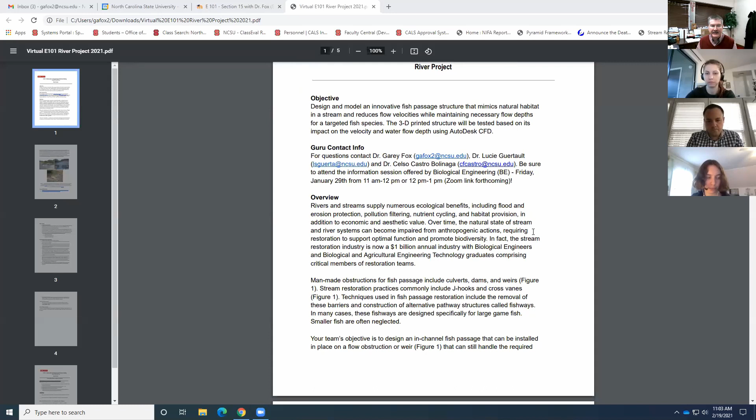What I thought I would do first is just go over some basic concepts, primarily from the river engineering project. Hopefully you can see my screen now. I just shared the project description. Really what we're aiming at is the fact that we want you to come up with a design that's going to replace some of the common structures we use in river restoration and stream restoration practices.

River restoration and stream restoration is now basically a $1 billion industry in the United States. Our department has a lot of alumni that work in this area. In fact, the project you're working on this year was originally proposed by one of our alumni, Chris Bass, who owns Chris Bass Engineering.

Appropriate to his name, with a bass, we're doing a fish passage study. The pictures you see in the project description are the typical types of structures put into streams and rivers. They can be made of rocks, or a lot of times logs, really hard structures. Many of these are referred to as a J-hook or a cross vane. In many cases, these structures can actually create a situation that prevents the migration of fish species up or downstream of that structure.

These structures are very good in terms of helping us control the flow and the sediment transport. A lot of times in stream systems, we like to refer to rivers and streams as living systems, and as they evolve over time, if we have an urban area upslope getting a lot of rainfall, but we've made those surfaces impervious and you're getting runoff into those streams, it can start to erode that stream bed, and that bed will start to drop down and make the banks get steeper, and then the banks will collapse in.

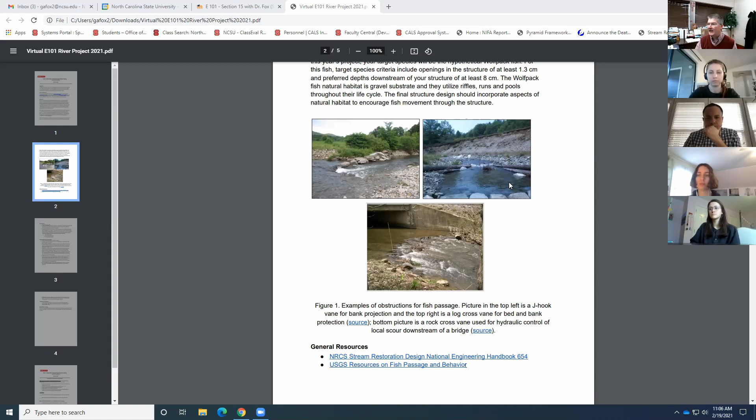A lot of times these structures are designed based on just hydrology and sediment transport, but in particular, we want to also consider the ecological impacts of the design as part of the river project.

There are a few different things that are going to be part of the requirements for the project. They're listed there under deliverables, and then also requirements and constraints.

You are going to design the structure to fit into our existing flume. We have two flumes in the department, and hopefully our second flume will be constructed here very soon. We have a smaller size flume, and Dr. Guertault is going to show you that in just a minute, but we have certain dimensions associated with that flume: 9 centimeters high, 20 centimeters long, and 7.6 centimeters wide is the dimensions of your structure.

You also need to have at least one contiguous opening of at least 1.3 centimeters. That could be a 1.3 centimeter diameter hole, or it could be a rectangle, something like that, but it needs to be open through your entire structure.

Unfortunately, this year, because of COVID-19, we are not going to have you 3D print these structures like we did in the previous year. Instead, we're going to have you just send us your 3D models, and then we will use those within a simulation package within Fusion 360, called CFD, or Computational Fluid Dynamics, and test your design that way. We'll talk about that more in just a minute.

There are several resources available for you to use. There's an NRCS Stream Restoration Design Engineering Handbook, which can be a very good resource, and also a USGS resource on fish passage and behavior. That can be a very good resource for the project.

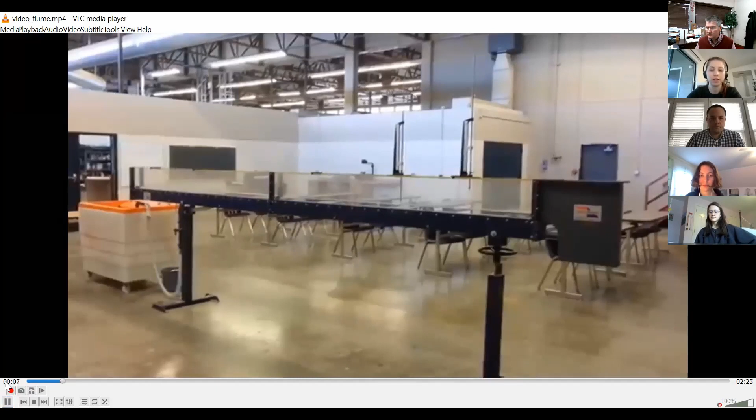So what you see here is the same flume as we have in Weaver Labs. If we get closer, you can see what happens if we have just a flow that is not disturbed by any type of structure. Then you will see what happens when we place actually a structure in the stream.

So this is called a broad crested weir, and that can represent the type of structures we put in the stream, such as the J-hook. Basically what it does is it creates an obstruction in the stream.

The water here is flowing from the right to the left, so the water level on the right will increase, and on the left you will see that the water level will be less higher, and the velocity or speed of the water will also be higher. Basically it changes how the volume of water is distributed upstream on the right and downstream on the left of the structure, and that also causes an obstruction for the fish.

So it's a solid obstacle, so the fish is not able to pass through that. And on top of that, the conditions on the left are not really suitable for the fish because the water levels are too low and the velocity of the water is too high. So it's not a good condition for the fish to swim there. Think of it as the worst case scenario that a structure can do in the stream.

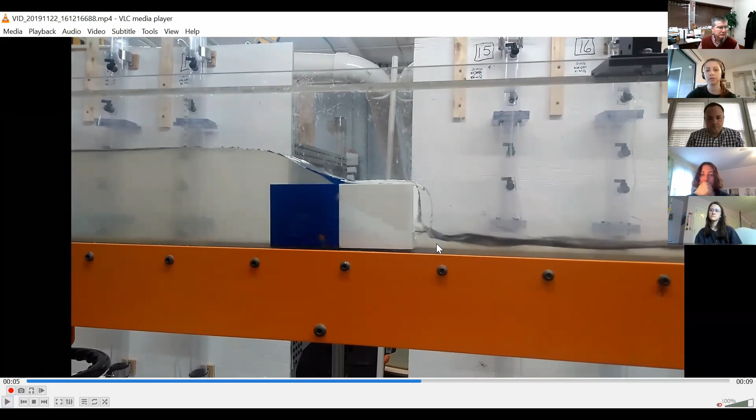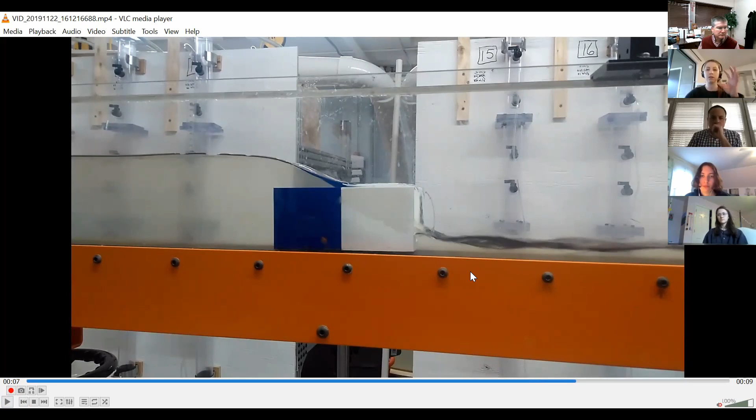So you can see here the water level upstream on the left is quite high, and downstream on the right, it's quite low and very fast. So overall, this was not a very good solution. It did not provide adequate conditions for the fish to pass through. Of course, it's open, so they could pass through, but in terms of water depths and speed, it's probably not very suitable for the fish.

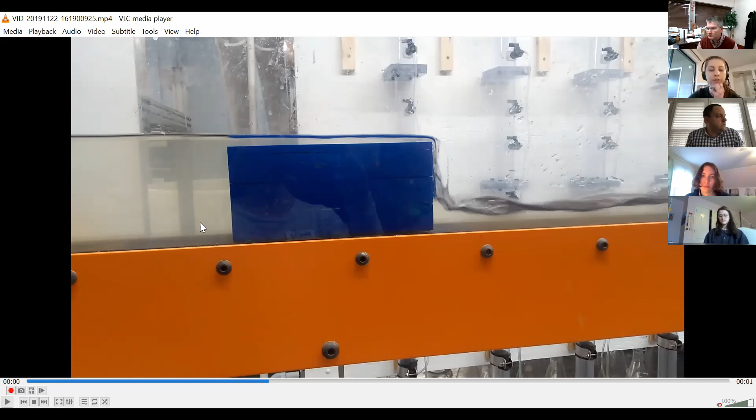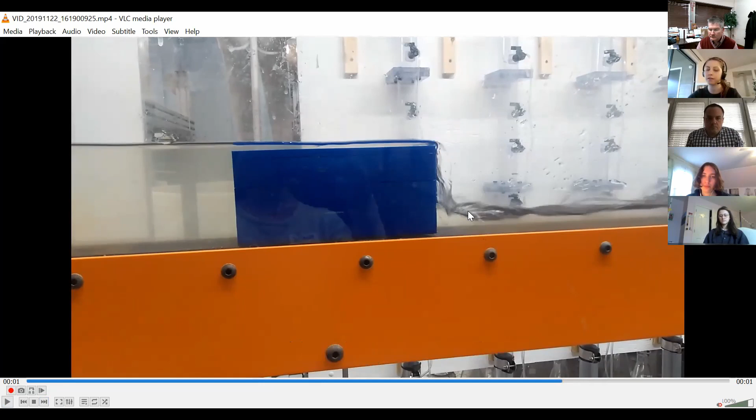So I can show you other examples. This one as well, I think, was a solid weir with holes in it, openings at different levels. And similarly, it does not really improve the conditions compared to the huge wooden block that we saw, the broad-crested weir from the previous video. The water level is still really high here and quite low, and the flow is fast on the right as well. Let me see if I can show you one more.

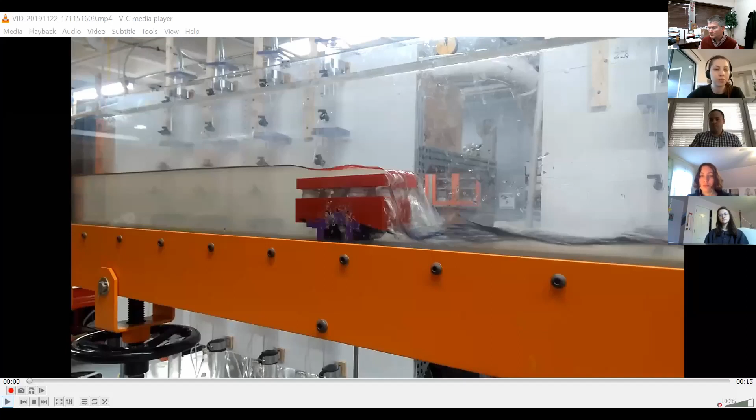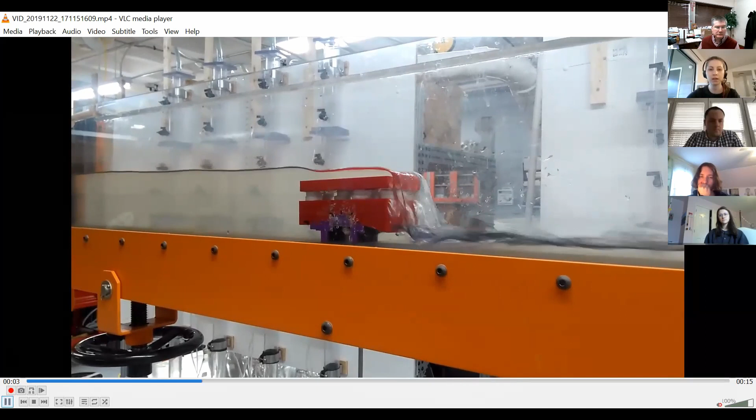So here you see an example of another structure which was a bit more innovative, with different types of holes. You can see that it provides more room for the fish to pass through, but it's still not ideal because the flow here is still very fast. So our goal is really to increase the water depth, the amount of water able to pass through the structure, to make sure that we even out the volume of water on the left and on the right of the structure.

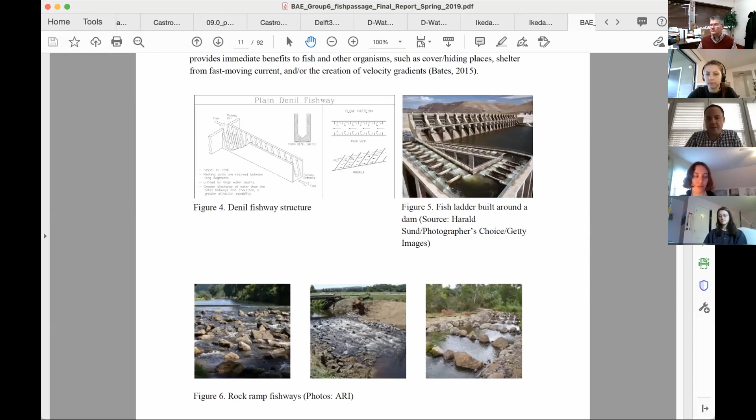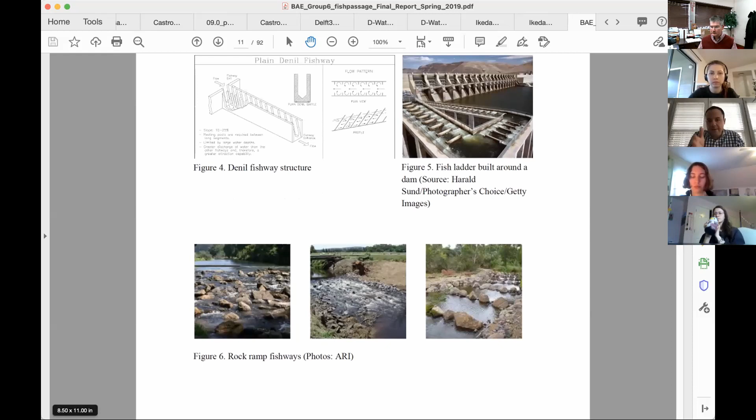And you see the obstructions around the ladder. The idea is that you create fast moving areas of water and slow moving areas of water so that fish can actually go through upstream. And here on the bottom, you see some fish pass structures as well, but these are more intended to mimic the natural environment, so you see a lot of rocks. The idea is the same: rather than having these steps in the dam, you have rocks that create areas of high speed and then areas of slow speed so the fish can rest as it moves upstream.

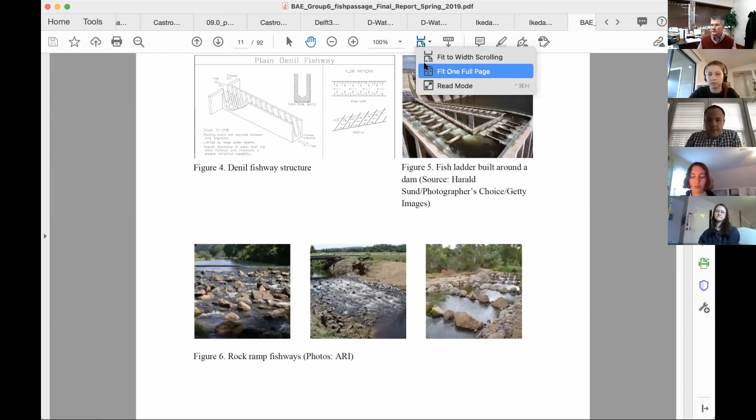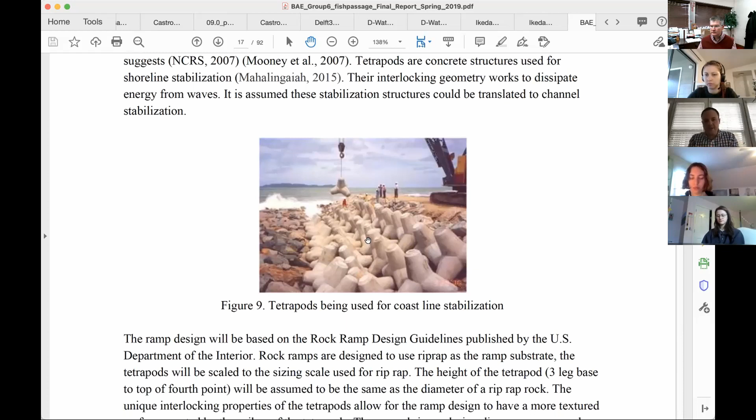And then the project that they actually did was basically with these tetrapods. The design from the senior design team was to interlock all of these tetrapods, so the porosity created by the structure was going to allow the same principle, areas of slow and fast moving water so that the fish can go through. I have a sketch of the design, and it will look something like this once it's installed.

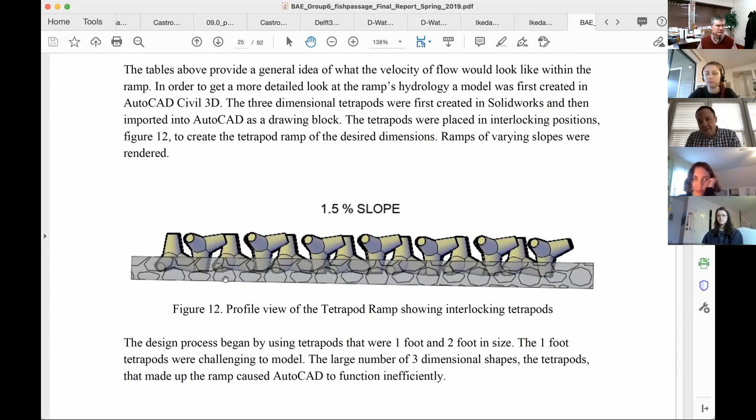The inspiration for this project was a dam in the Dan River, close to the border between Virginia and North Carolina. This was going to be part of the dam so that it could be relicensed and allow endangered species to go upstream.

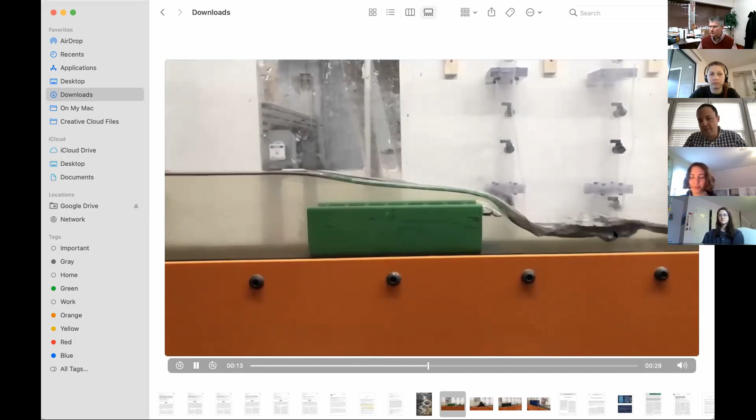If I click play, you'll see it has the same flow patterns: relatively deep waters upstream, and then the flow gets shallower and faster, with faster shallow flows going downstream. In terms of how much it changed, it reduced the amount of water upstream and increased it downstream, but it didn't have as large an effect as some of the others you'll see.

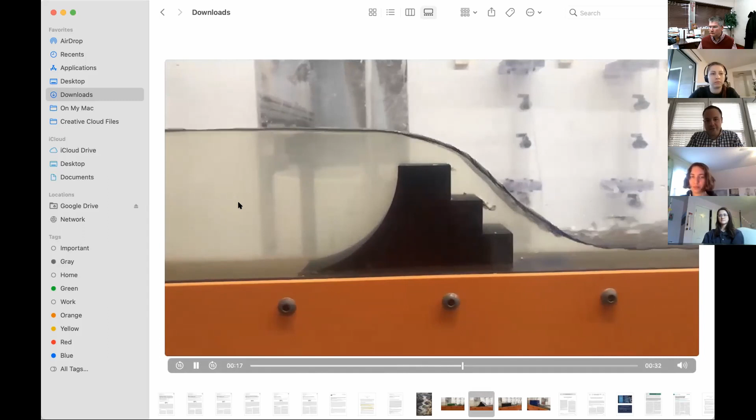This group took the concept of a fish ladder in a more literal interpretation. You can see it's actually a ladder for the fish to climb to the other side. In contrast with the previous one, the water depth upstream is significantly higher, to your left, and then you have a waterfall where the water accelerates and goes downstream.

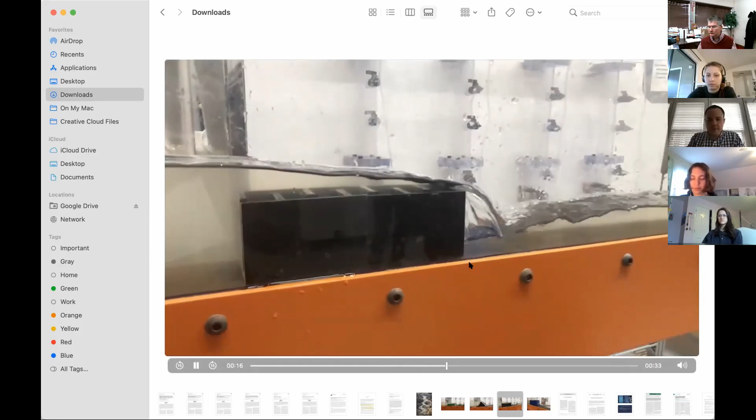The final one I'll show you today had a bit of a fitting problem. You see a gap between the bottom of the flume and the bottom of the structure, which in theory shouldn't happen. They had maybe 10 to 12 holes in the middle of the structure, and water was just flowing through. You can see water going out of the top ones, while the lower ones are submerged.

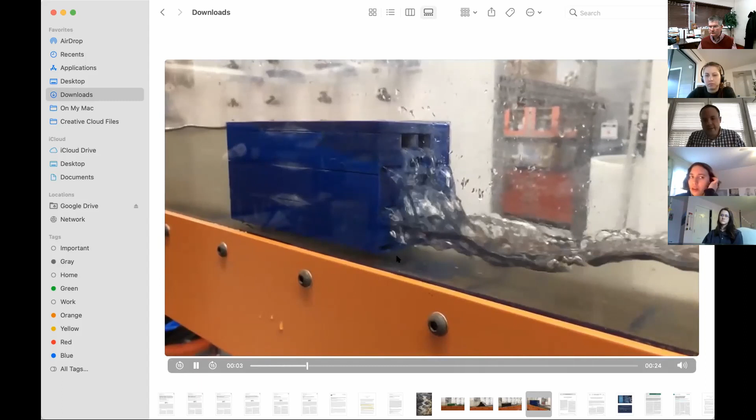Same principle: they are trying to generate flows of fast and slow moving water.

One question we've received in past sessions is: since you're not testing the structure directly, how can you have a proxy to understand how well it will perform? We've said that volume occupied can be one measure. You have a structure that takes up one volume, which is the worst case scenario, and your design should reduce that occupied volume. You can estimate this based on the porosity of your design, or how much free space you have.

Very good. Hopefully you can tell that we're very passionate about this topic. This is something we work on a lot as a group within our department, and something I think will become even more important moving forward as we put designs into stream systems, trying to do this in the most natural way possible.